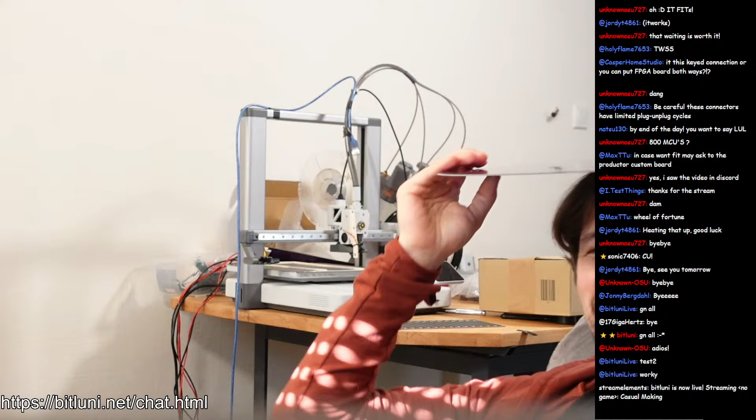So we have this board. I can do a Colombian head, I can make a Colombian head. I just need something on top here, a 50 centimeter Mexican sombrero.

And what we can do, oh yeah, so this was one of the boards that we received yesterday. Then we have, you can still see we have sunshine here.

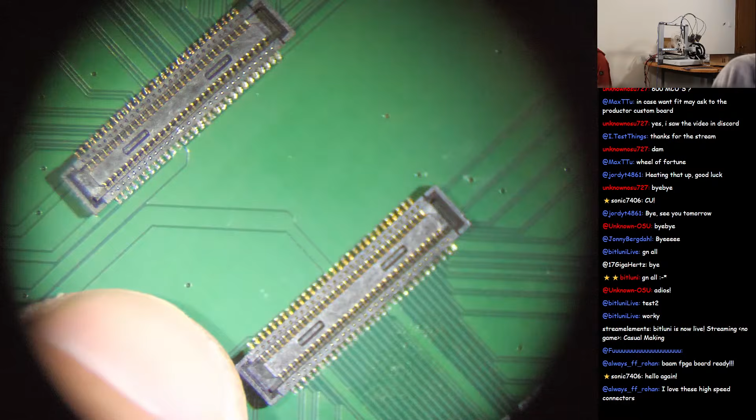I'm wondering, there must be some sort of compliance in this connector, because you can never pull it perfectly to 0.1 millimeter.

Millimeters, because the footprint, I think I will make the pads even shorter, because if we look closer, oh, enhance.

Wait, oh, I can't enhance because I put the microscope quite high yesterday. Okay, let me enhance even more. Here.

Can't enhance even more. I think pin pitch is 0.4, 0.5 millimeters here. Yeah.

The reflection is confusing because it looks like it's not really well sorted, but it is. Yeah, no, that's all right.

Yeah, it could be shorter by, I don't know, even half a millimeter, so it would align itself better. This way we have too much space for adjustments. Yeah.

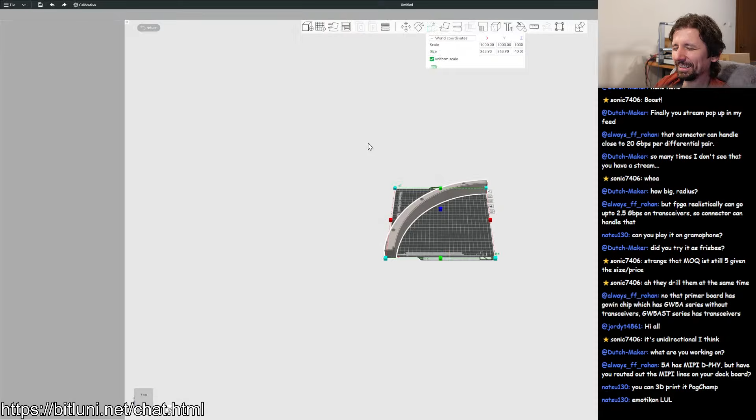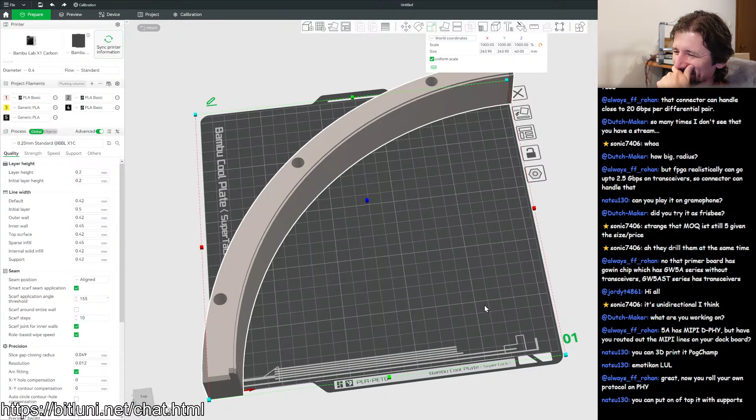Error. Yeah, no. I can rotate it, and no. I think I need to cut it in thirds or whatever. But cutting it in thirds, no, in 6 parts is gross. Okay, 6 is not a bad number. It's not a prime.

Dang, all right, so let's take... how do I cut it so I can still get it bigger? Okay, first of all, I need to keep the faces as they are right now, so I guess I will cut it in pieces like this here. So it's not quarters, it's, yeah, in 6 pieces. Alright, this will be interesting.

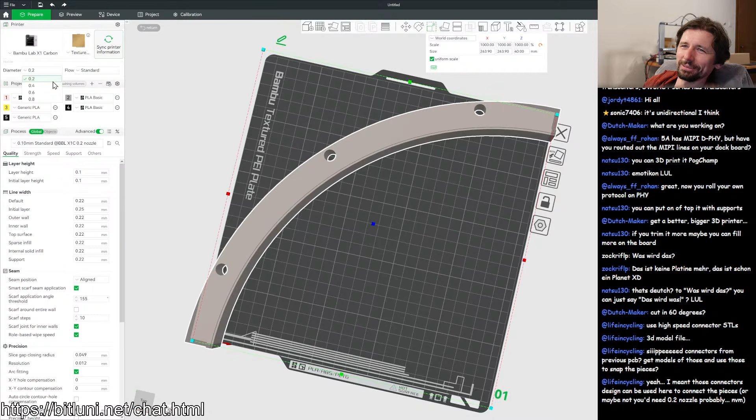Alright, so this part should be a little bit smaller, but now we need to adjust the groove. So how do I do the groove? I think I will do the groove a different way. We can do the groove, let me create a cylinder maybe. Nah. Yes.

Create cylinder. Yeah, or this is not okay. Vertices 128. Depth is, I would say, what kind of depth do we need? Like 4 millimeters, that's 0.4 since this is in centimeters. Everything. Location, okay, 0, 0, 0.

Radius will be... where are we? 25, a little bit more. 26. No, 25. Okay, that's the 20. That's a little bit much. 25 point, since it's 4 millimeters.

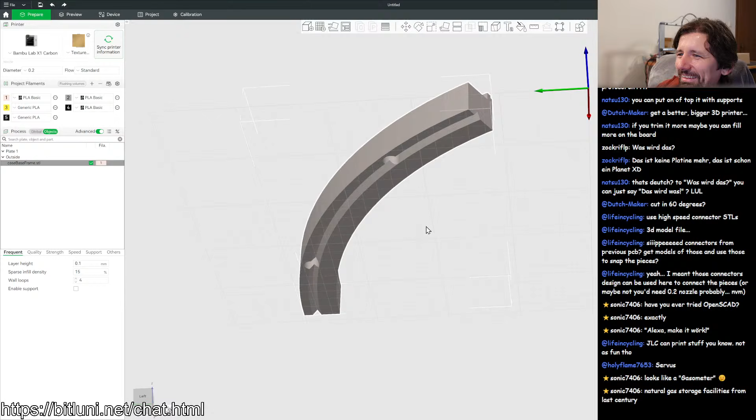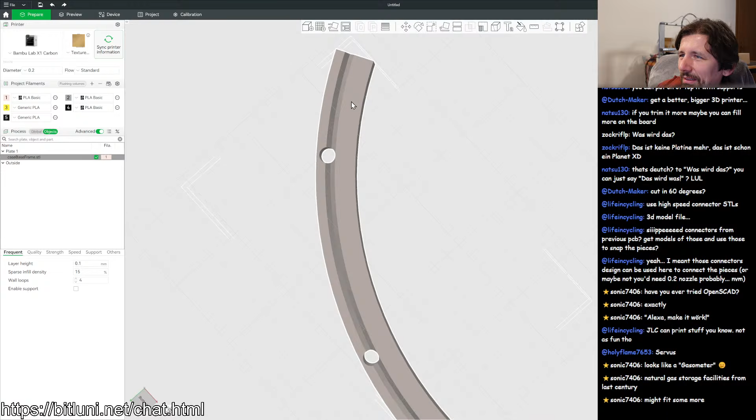This is 1/6 of the thing. Look at that. Oh wow. Weird. Maybe there would be like, if we have, yeah, if we had something to align it, but well, we can't get everything made perfect here.

We can even print 2 at once if we would like to. So how does that? That's the textured PEI plate. How long does that print?

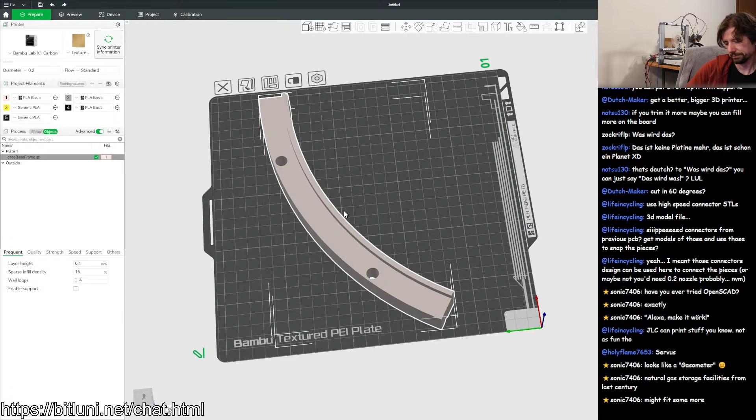I think I have, let me check what, 0.2 millimeter is really slow. But I think I have, oh I can't see. I might have 0.2 millimeters in there, if I didn't change it again. Okay, standard, flow, PLA, basic. Yeah, I think I have.

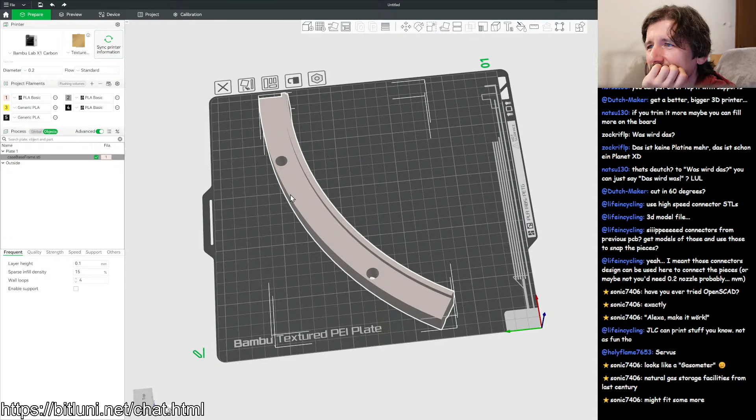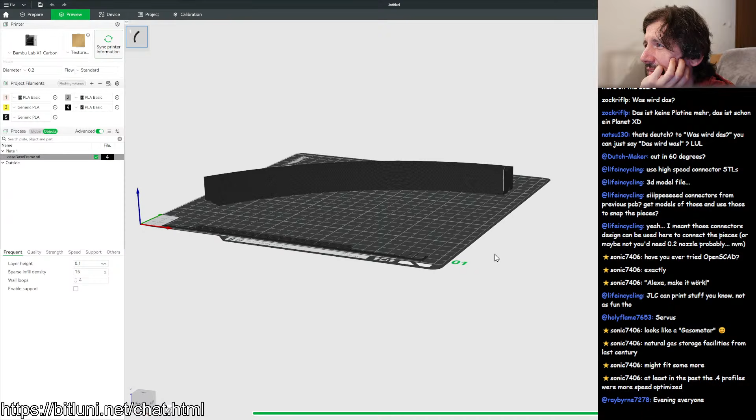We can try printing in black here. So let's. Oh yeah. Hey Ray, let's test how that does. Alright, that takes 6 hours.

Okay, let me change my profile. This is not good, it's way too slow. I need to print so many of those, it wouldn't be finished this week. Okay, what about 0.8 millimeters? Yeah, 1 hour, that sounds great.

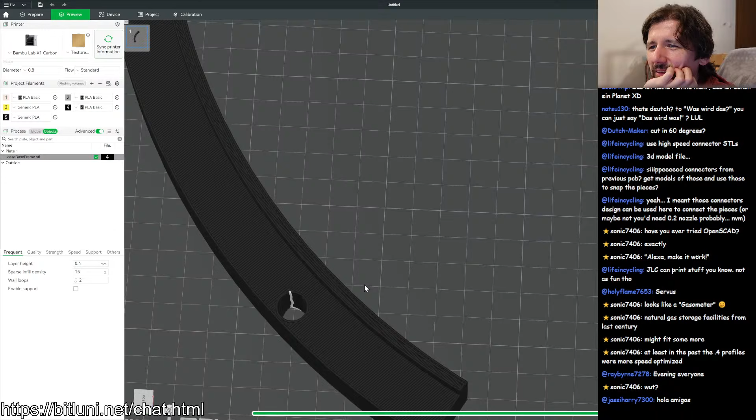But the 0.2 millimeter nozzle is currently mounted on. Yeah, we can change the nozzle and do that. That looks like, I guess that will work. Hey, jassiharry. Oh, we need 6 of those, not only 4.

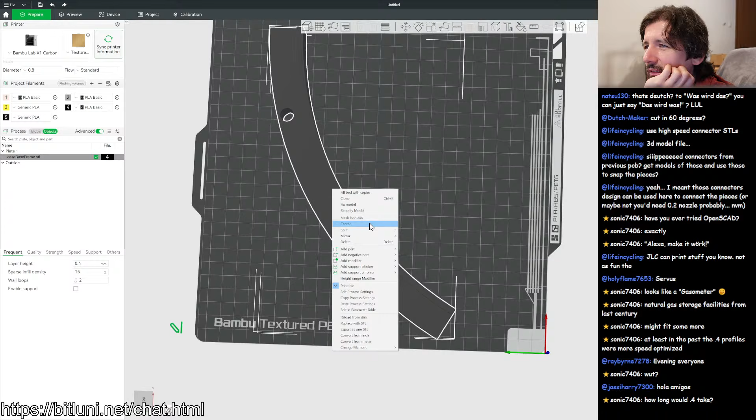We can try prepare, a lot of this is preparation. So copy, where is it? Mirror, no, centers, fix, clone, and clone 5 times. I think we can print 3 at once.

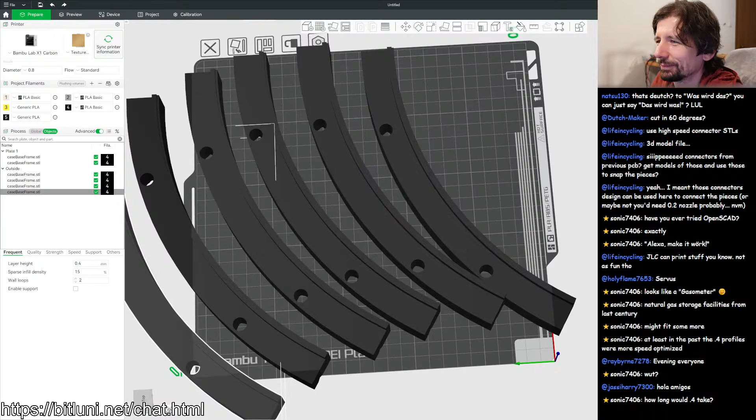Ah! What would happen if we print 3 at once? It's so weird, it looks like it's off. I guess we would need to optimize the placement.

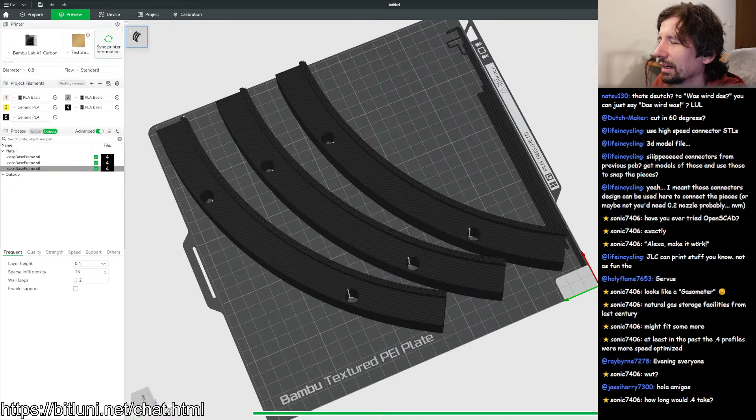Let's just see how that slices. Is it? Yeah, we only save like 15 minutes. But we don't save anything because if one detaches, all the prints are broken. So I don't take the risk unless I'm going to bed and leave it printing overnight. So I will just print 1 now, and let's switch the nozzle then. Oh yeah, that will be interesting.

Do we have a nozzle here? Oh, yeah, let's take a look. What kind of nozzles do we have? We have... Oh, I don't know if we have 0.8 here. Yes, we have 0.8 nozzle here. But it's like a partial... It's only the nozzle. No, it's nozzle with fan and everything. I hope this is the right one for... Yeah, that is the nozzle for this printer. Hey, the Sheepu!

The Sheepu, real talk about Open Hardware Summit. I'm still not sure if I can go. Yesterday I had a mega rant about the public transport, which they want like 200 euros from me to go back and forth, it's like twice as expensive as going alone by car. So I will see how my project proceeds, and if I have it ready, so we can code the ultra cluster at the weekend, then I will put it in my...

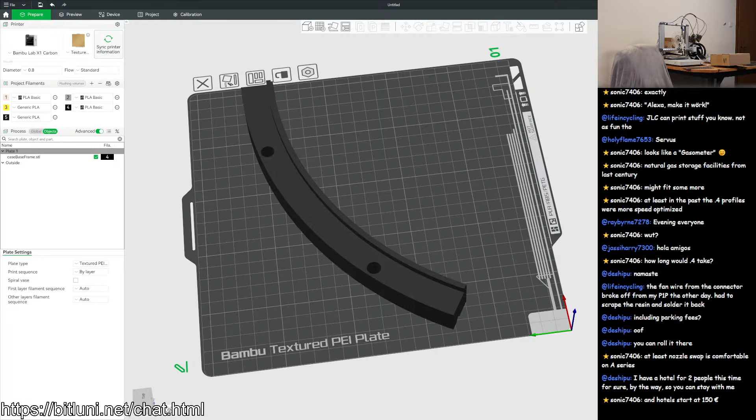Okay, I will clean that thing. Oh wait, you're not seeing anything. Camera.

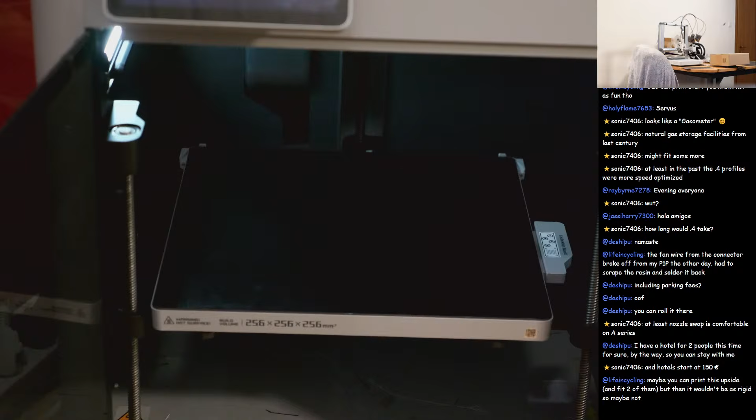Yeah, I can fit 3 or 4 on the plate. No worries about that, I just don't want right now. I don't want to risk, if one fails or something, to risk like 4 hours of print.

Okay, new firmware. Yeah, okay, you can load new firmware. I don't want to remove the AMS.

I can print so, oh yeah, okay, we can print 2, but you want a quick stream, so we will see only. Okay, yeah, let's remove that.

Can you even see anything? No, you can't. This tripod is not what we need here.

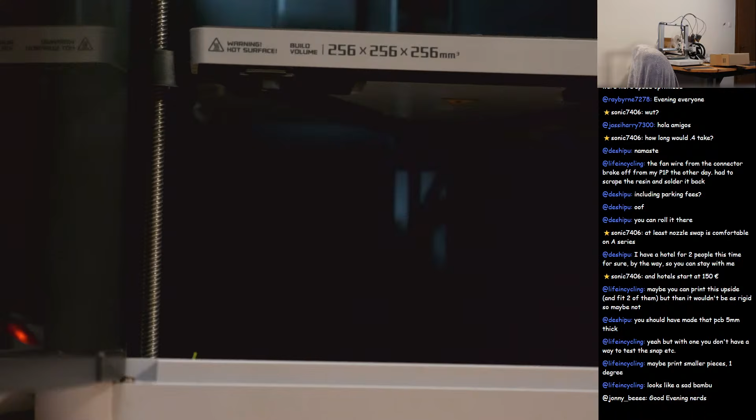How do I... Yeah, I will take the camera off the tripod, sorry, and put it on something. Yeah, just put it. I put it on a PCB, a stack of PCBs. So this is my new tripod here. Nope, not good enough.

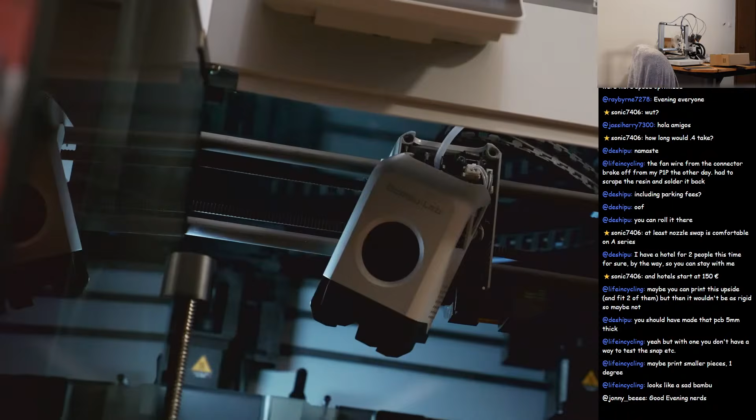I need more PCBs or connectors to stack. I need some parts here. This is now a good view. All right.

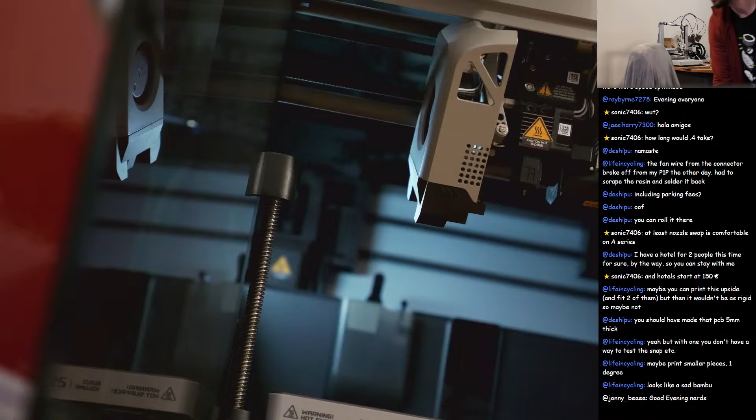This is the wrong tool, give me the right tool here. Oh no, is it even here? The printer, we are breaking the printer today. Switching the nozzle to 0.8. I might need to, I don't know if, do we need to heat it up? No, I hope not.

Oh wait, I had tools here, let me take this one. Start a fire, okay. That's 2. Yeah, I switched, I think this is 0.2 right now, so I have switched it before. Just need to get the right size tool size here. Huh?

The light is so dim. Weird. I don't have the right size tool here. Okay, I'll be back in a second, let me grab my tools.

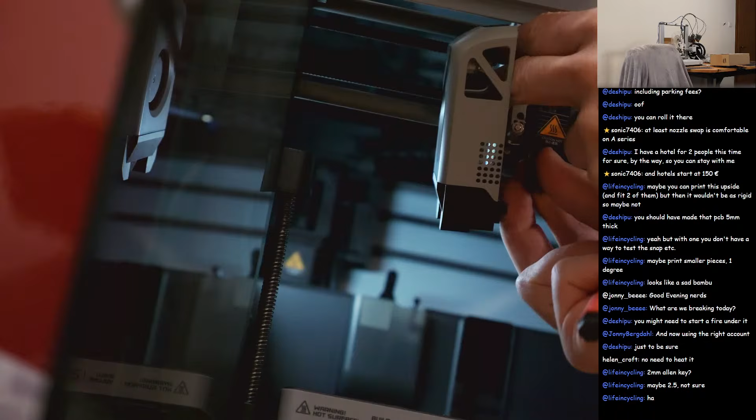Am I missing something? Here we go, nice. And we need to disconnect these things here. We don't want to rip off the connector. Here we go, so that was a nozzle of 0.2.

Yeah, now we're having 0.8 for a change.

How does it, where those cables are? What was the cable management here? If I press it in like that, it doesn't fit. Okay, huh?

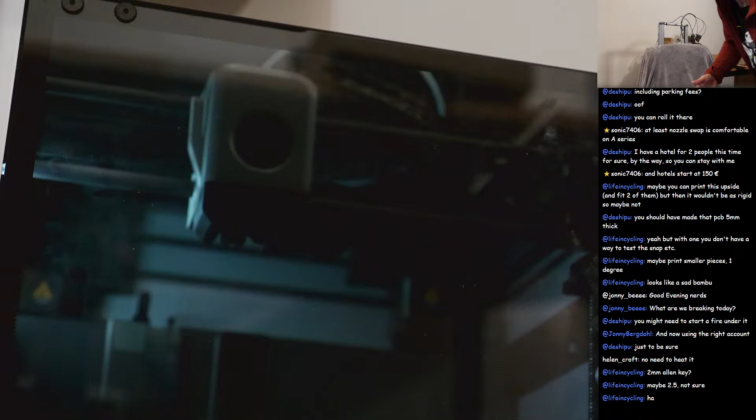The camera was totally off. Okay, I will clean the bed while it's updating. It runs a software update, and then we can start printing it.

Americans would call it Windex, just a window cleaner, or glass cleaner, Glasreiniger. Needs to be free from fat, any grease needs to be gone, so everything sticks nicely.

All right, oh no, why is the update so slow? Still downloading? Oh no, I shouldn't have started it. What is it downloading? It hangs at 1%, does it even have a connection?

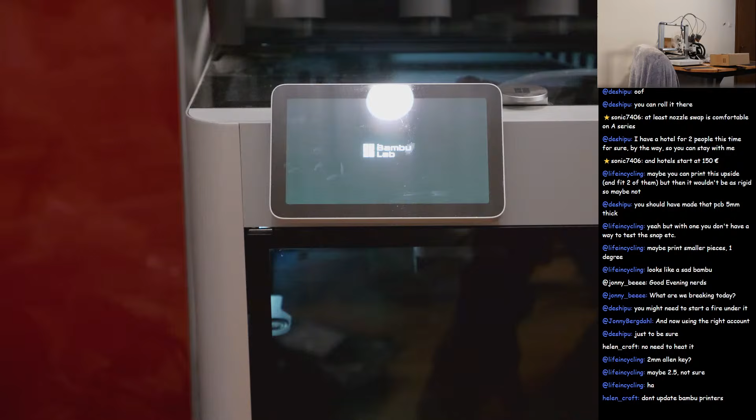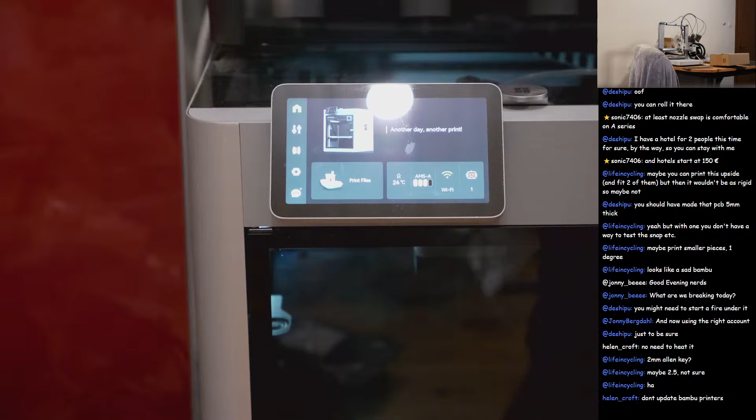Nope, let's not update right now. Alright, let's try to print it with the new nozzle. Standard flow.

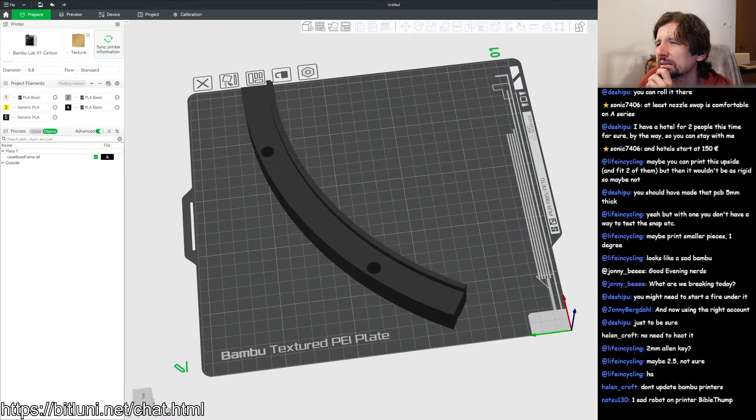Yeah, let's just slice the plate and print plate.

I hope it's still connected to the WebUI. External? No. Time synchronization timeout? What? What's going on? Wi-Fi?

Who's there? Hey Alex! Are you in Berlin already? You also going to Open Hardware Summit?

Okay, let's try other Wi-Fi.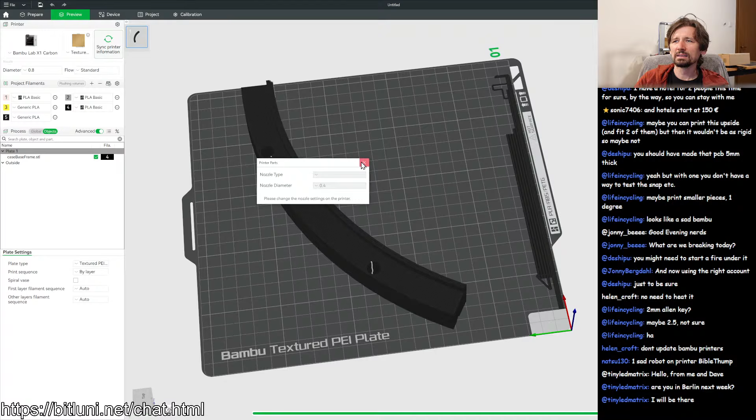Yeah, from Friday. I'm not sure yet. I would need to go by car because Deutsche Bahn is trying to rip me off. Even the Bahn card doesn't make it cheap. So, and I have a big...

Let me print calibration settings. I have a big device, hopefully to bring and show.

Oh, you're in Munich. What did you do in Munich? Just visiting Alex, or any occasion, a special occasion? Did I miss like Electronica or something? No, Electronica should be later this year. Should it? I don't know.

No. Where's the settings for the print options? I think the nozzle.

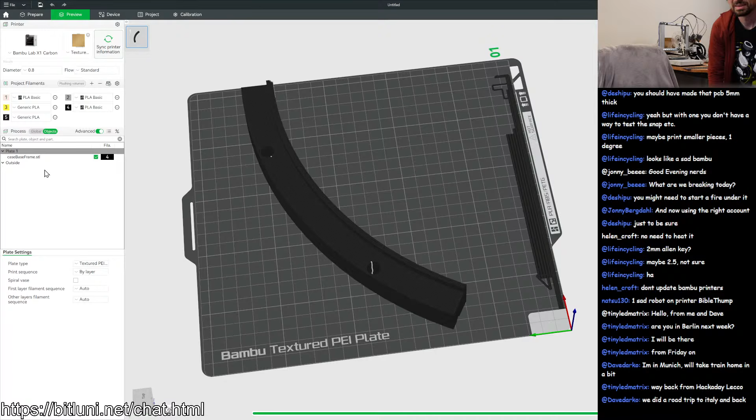Why is it so hard to print anything nowadays? Okay, status X1 carbon. Connecting. It's not connecting anymore. Okay, I probably need to reconnect it because it says my login information expired.

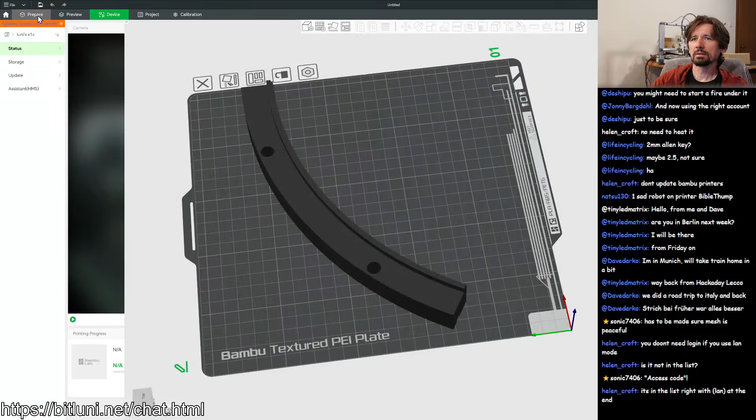Storage needs to be inserted before printing via LAN. I don't have an SD card in there. Okay.

Now it's probably also picky about the SD card. Where are my SD cards? In this chaos here. Okay, let's see. What do we have? Some. That's 32 gigs. 8 gigs.

Now it probably complains about the format. Format required. Okay, let's format the storage. Might be a broken card though, I have no clue what's on there. I don't care, I just delete everything now.

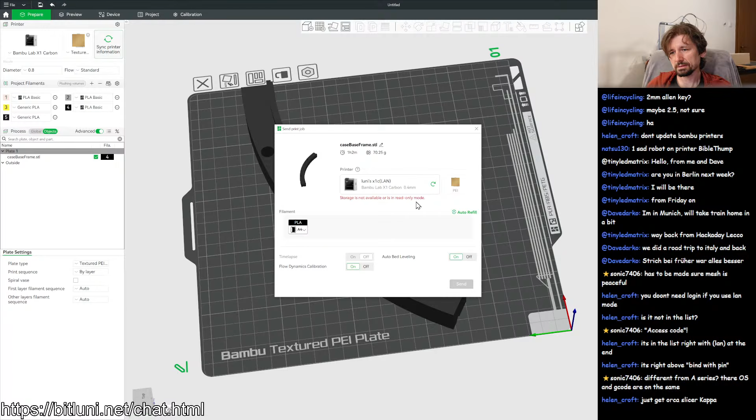What else do we have? We have here another Transcend and oh, this one! Lexar. I think this one was shipped with a 3D printer. Yeah, it's not formatting. All the formatting takes too long.

Orca slicer. Is this good with Bambu Lab printers? Okay, yeah, that's not formatting. It died. It hangs. I think this SD card was faulty.

Oh, that's cool. Didn't know that. Oh yeah, I think I saw that the Bambu Lab Studio is open source. That makes sense.

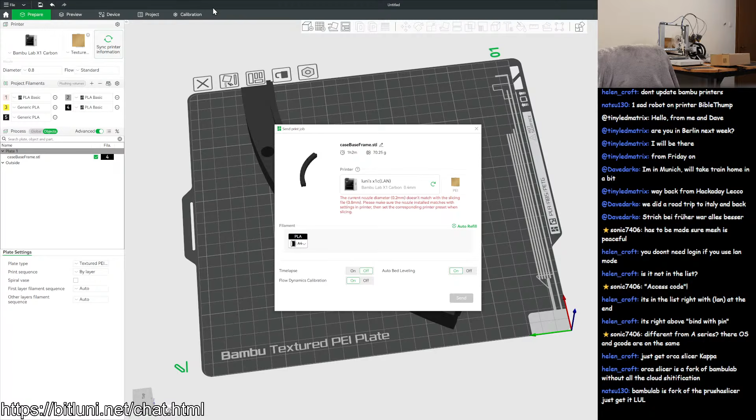Alright. Storage. Okay, yeah, storage is working. I don't need to check if this card is really faulty, so I will just throw it away. There's no time.

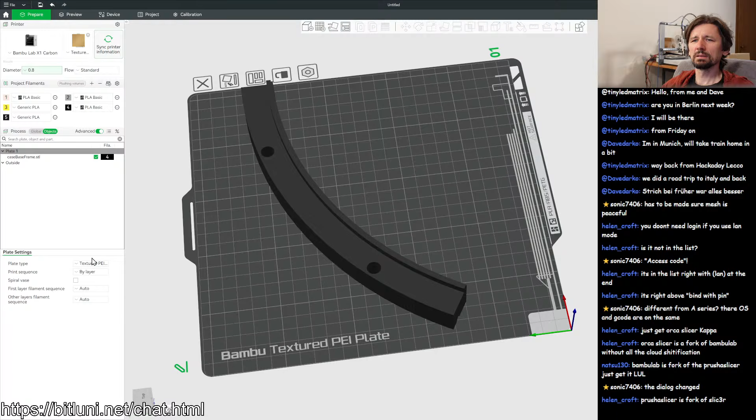That's wrong. Diameter. Do I need to set the nozzle size in? Okay, I think I need to change the nozzle size in the settings, but I didn't find it yet. Chamber motion.

Settings. Yeah, but where's the setting in the... I can't find it. I can't find the setting on the printer. Nozzle extruder. Oh yeah, here it is. Okay, found it.

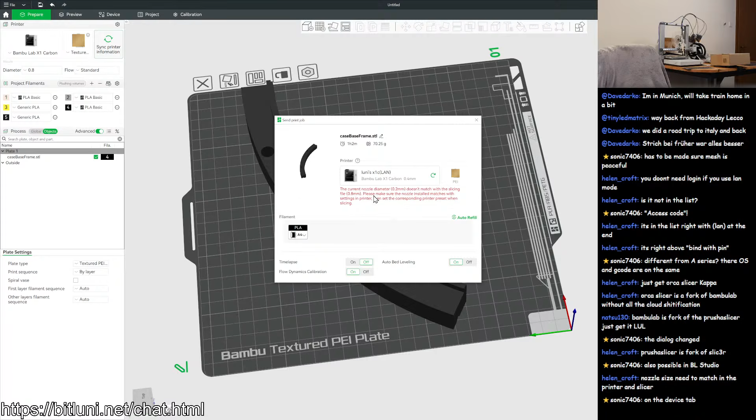Ah, here we go. All right. Refresh. That's wrong, my friends. That's wrong.

Doesn't show. Here we go. Send. That took me half an hour.

It's still not printing. Let's wait and see what happens. I might also need more filament. Not sure if that kilogram that I have there is enough.

Time-lapse BibleThump. Yeah, alright. No updates then.

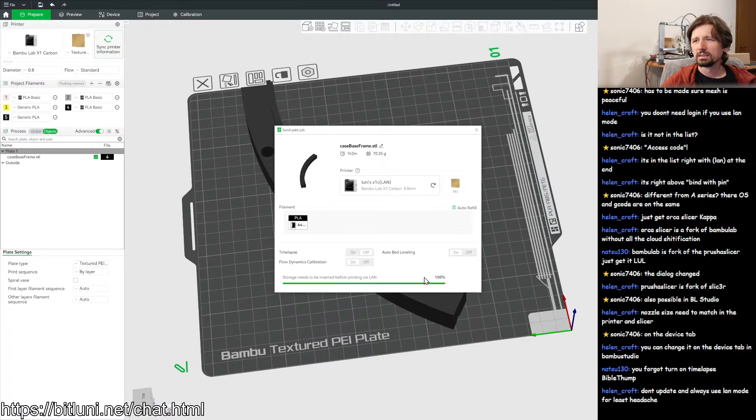Okay, it says storage needs to be inserted, 100%. Is it doing anything? What is it doing now?

It doesn't look like it. Yeah, it shows 18.9 gigs of 29.5.

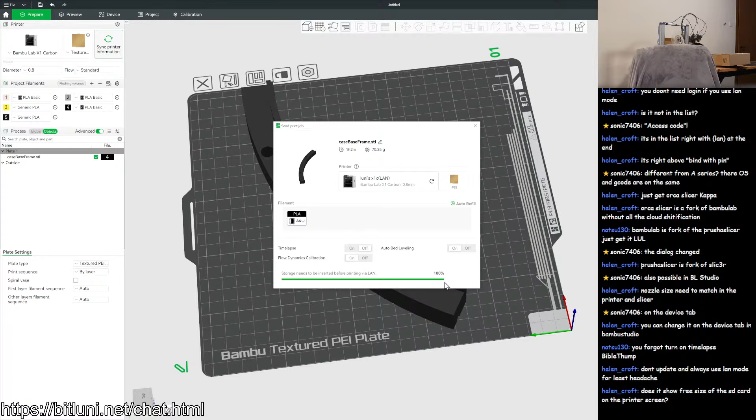Alright, print files. There are even files on that card. No, internal SD card. Yeah, there is stuff on the SD card. Oh, this is so weird.

Or let me try again. Oh no. Yeah, okay.

I will also restart the printer. The timing, nice.

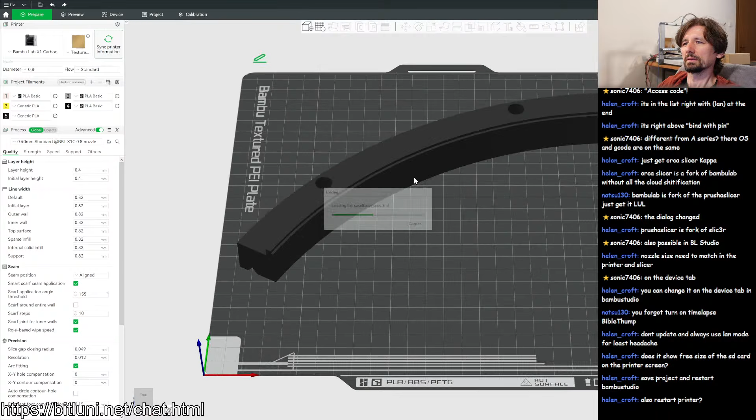Yeah, hotfix, blah blah blah. Blah blah blah, Mr. Freeman. Carbon, textured PEI, blah.

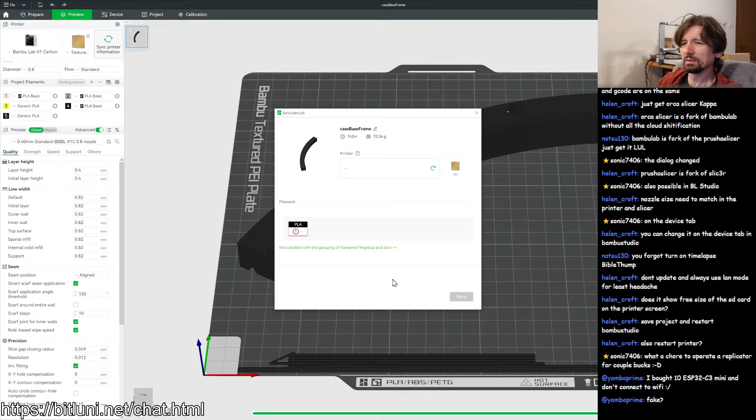C3, don't connect to Wi-Fi. Yombo, I have no clue. What's going on there?

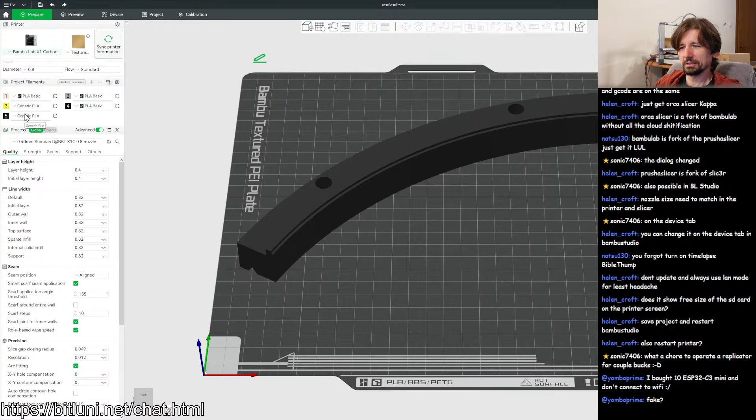Did you try any firmware where you discover networks or whatever? I know, some sort of Wi-Fi issue. No printer.

Okay, we are connected. Yeah, I would try to see if it even lists open network, or just lists the network at all, so you know Wi-Fi is working. And you have maybe, I don't know, that there is.

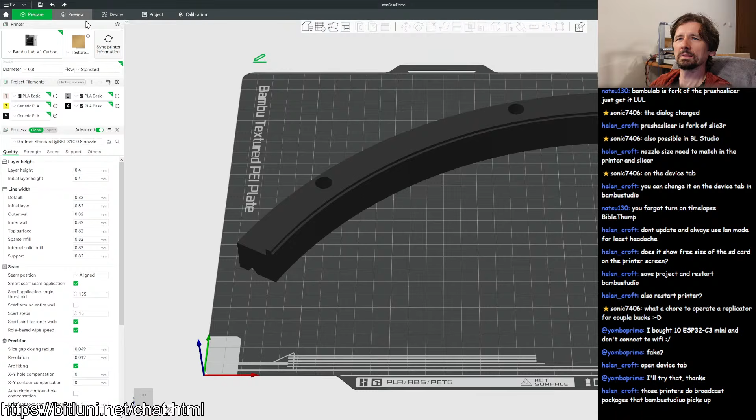Okay, let's try again. Now it shows everything on send. Ah, here we go. Ah, some global variables or stored state or something. Ain't nobody got time for that.

C3, is it like 5G or 2.4? Okay, it wouldn't recognize the Wi-Fi. I don't think C3 even supports 5G network. It's weird. 2.4, okay, that should be supported by any router.

Let's turn on the camera, can we? Play. Let's see if it does anything. It moves, yeah.

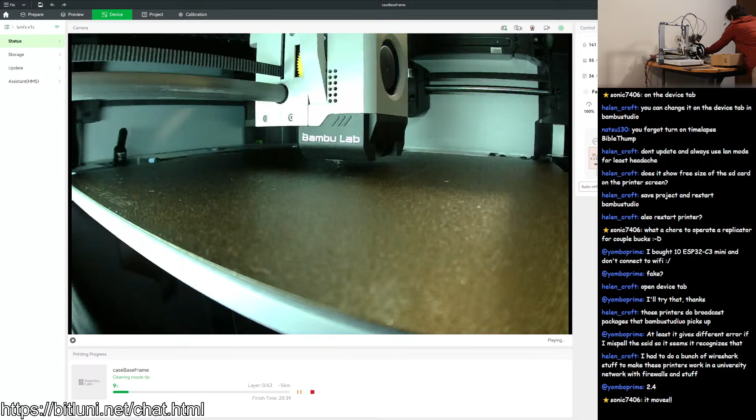Okay, I have some connectors here, that's some parts. Okay, these are 22 microfarad capacitors, 25 volts, so they're the input side caps.

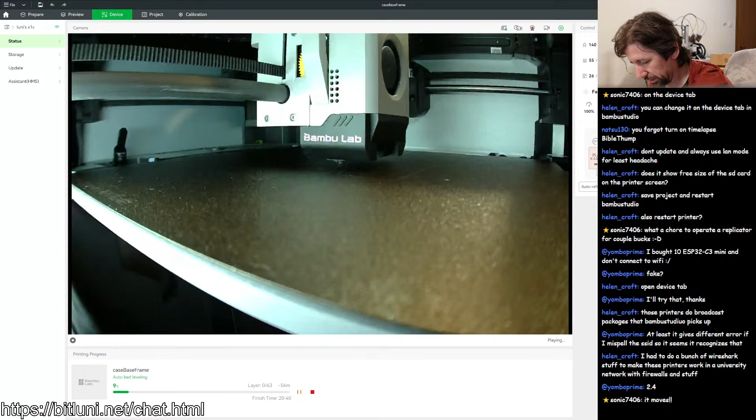Not sure how many I planned to use there. Then we have some of the JST connectors. JST.

We need a trimmer. A series. Really? Oh.

Oh, presence sensors. That's what I was thinking today about, like if I want to place some control, presence sensor control for lights in my home, but not connected over Wi-Fi, just standalone.

Okay, I think, yeah, these are the output caps. Terahertz radiation, that would be interesting. 6.3, okay, yeah, that's the output caps, I believe.

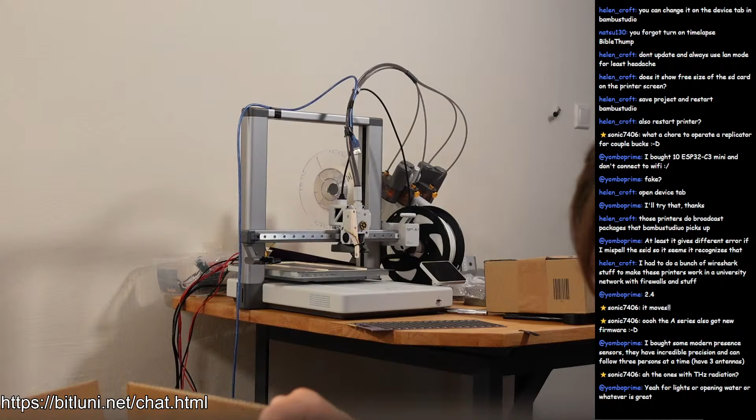What's one thing that I'm like, in my living room, there is a window just behind the sofa. Okay, now it's doing the vibration test. Behind the sofa, and whenever it's afternoon, the sun is shining and we have glare on the TV.

And I want the... oh wait a second, look at that, the pink connectors. Sweet.

That's the pink SATA connectors, and we don't have a use for the SATA yet. I bought so many SATA cables. And these are the other SATA connectors. Okay, so we found that.

We need to open the Reichelt box, with, I think, the trimmers inside, if I didn't buy them. Where were the trimmers? Because if you don't have trimmers, I don't need to do anything.

Need more packaging material. More. Oh no, these are the... okay, these are the 2mm headers. I bought some from Reichelt because they shipped quicker.

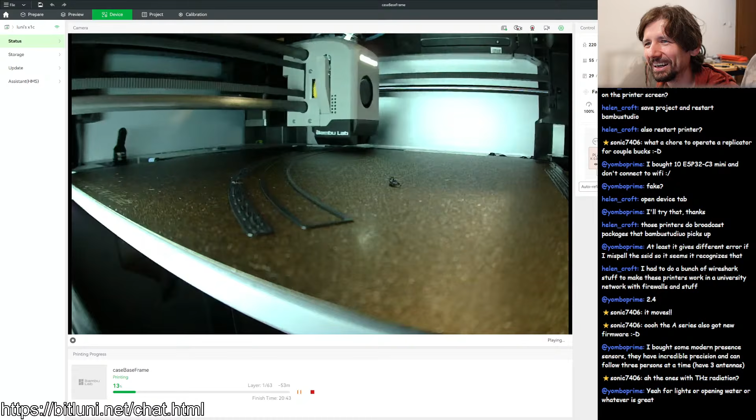And not wasting any time here. How much infill does it have? I didn't even check. Not that it's like solid.

Infill. Oh, sparse. Yeah, but this wall strength should be plenty of strength here.

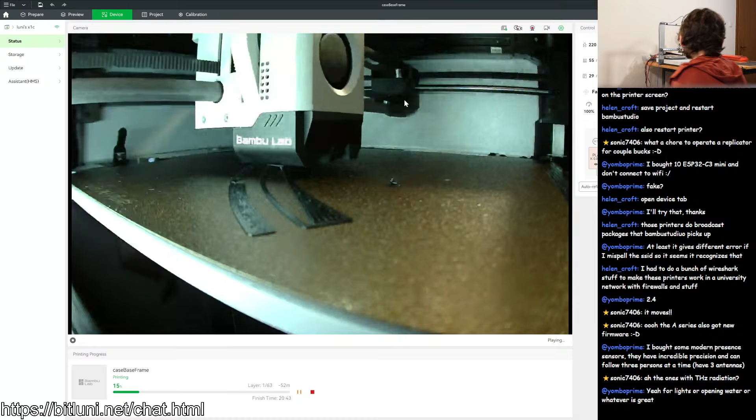Okay, let's make the jig then. I will use the bigger camera again to share every step of that with you.

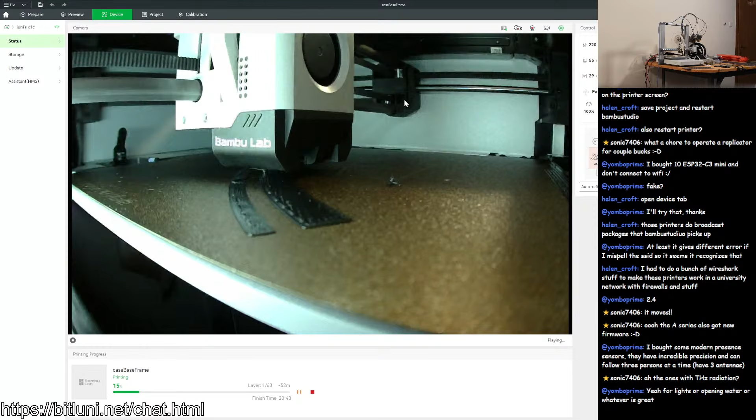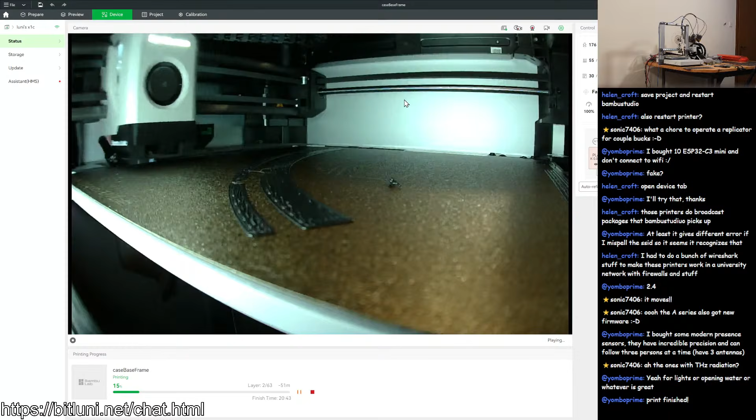Oh no, I pulled off the cable. Okay. There we go. You're joking. What did it do? Why did it have like a pause there?

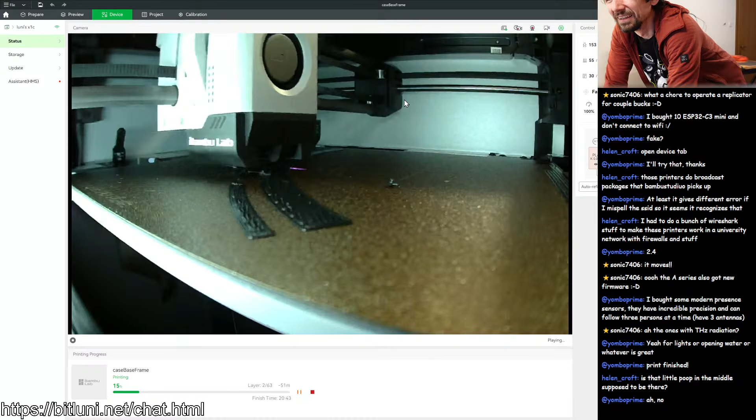Weird. No, there's like debris. You mean this here? All right, pause and clean. Probably because the first layer always has a little bit of variation in height, and after that it's better. I have no clue, might be.

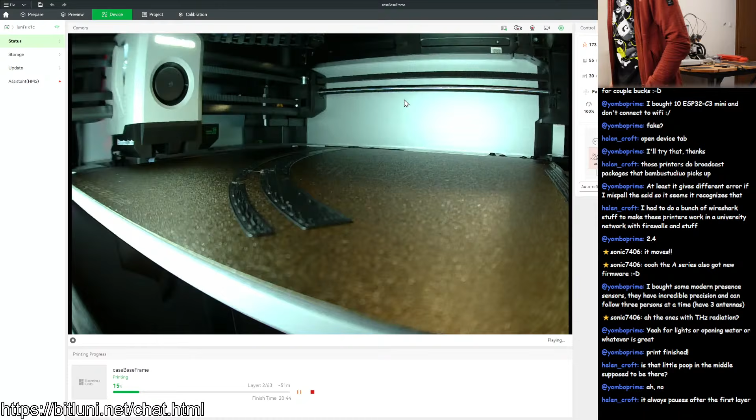Okay, Kapton tape. We used it yesterday. There it is.

This is our jig. Oh, I'm not sharing.

Ah, okay. Need to get this aligned properly, like right angle. Now this.

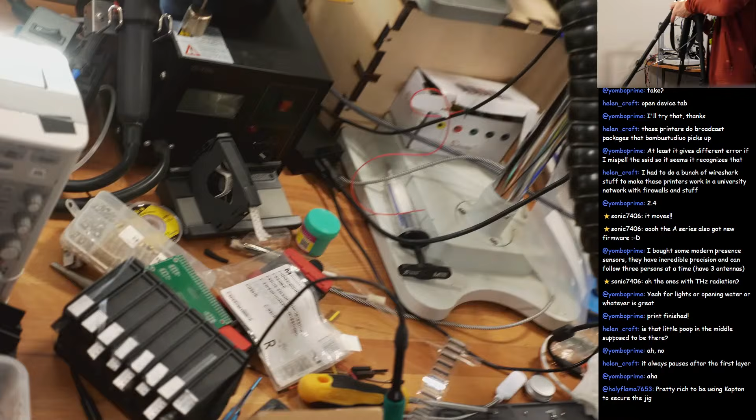Barf cam activated. Ah! The chaos here. The chaos is real.

Okay, yesterday I used a little bit of stencil as the spatula. There is still some paste from yesterday, and I think this is still good. No, it's not. Okay, let's get new paste then. But actually, it's not bad. It's not water based, so let's try to.

Is the reflection bad? Let's try to paste that. Yeah, it's a little bit, it feels too thick, especially on the big pads.

Ta-da! Nope. Here it is, these pads have not enough paste. Here, now it's good. Alright, that's that.

Hocus focus. Hocus focus! Damn it. Here we go. Yeah, good enough.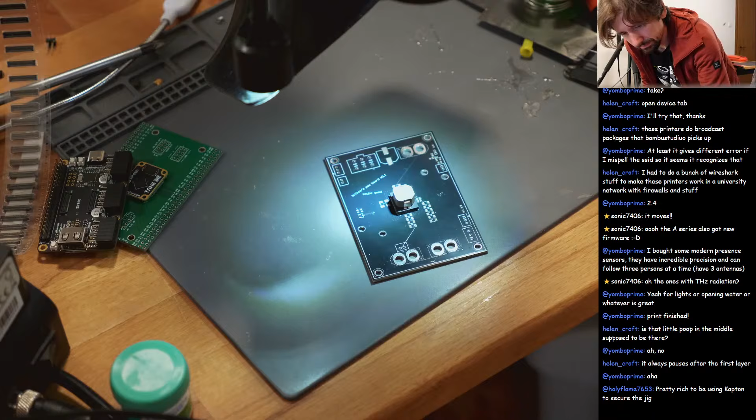Have all the stuff here. Did I mark it even? Let me check if I. Oh, let's see.

Because I might need like different caps for input output. I have no markings about what type we need there. These here, and these here.

Hey cosine, you're a little bit late. I'm just about like to reflow that one and be good.

We are trying to assemble the ultra cluster.

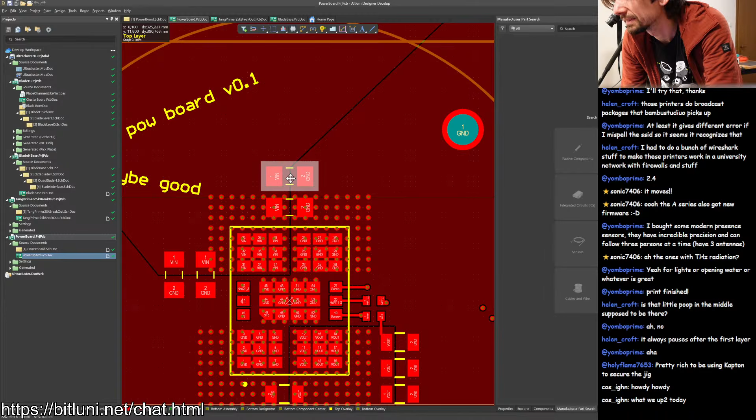22, 22, 22, 22, and these are all 100, yeah. 100, 100, 100, 100, 100, 100, 100. All right, so there is no surprises there.

We will just place the caps and be good for today, huh? Oops.

All right, need to be sure that I place the right ones here. The 25 volts needs to go here. Any other small things? Oh no, I need to place the other components as well. There are some.

For I think 0 ohms there as well, but I should have them here. So let's do the biggies first.

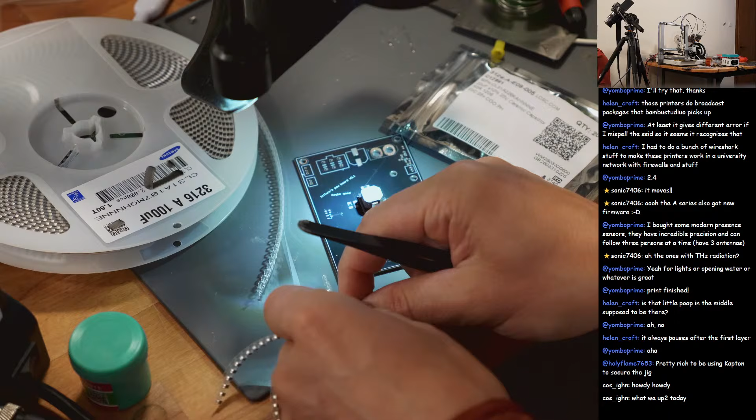Need 4 of those. Right. Ah! Come on. This is sticky. Like that.

Alright, now this was that one. Let's do the 100 microfarads. I'll use a full reel of that. Oh, there's a stray one. Interesting.

A pick and place machine now. This is a power regulator. It converts 12 volts to 3.3 volts, or any other voltage, because we will use a trimmer for that.

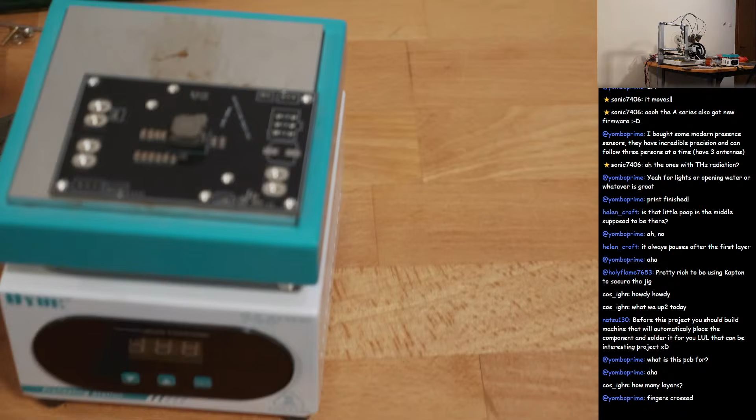I want to see it too. Okay, bath cam mode activated. Oh, yeah, fingers crossed, it will be weird because this is quite heavy on copper. That's why I'm using the bigger, slightly bigger thing here. But it's a low temp paste, so I'm not really worried.

Give it to me, baby. Alright.

Very condensed stream today, except for the struggle setting up the printer. Alright, it's 31. Okay, let's wait a little bit before I record actually.

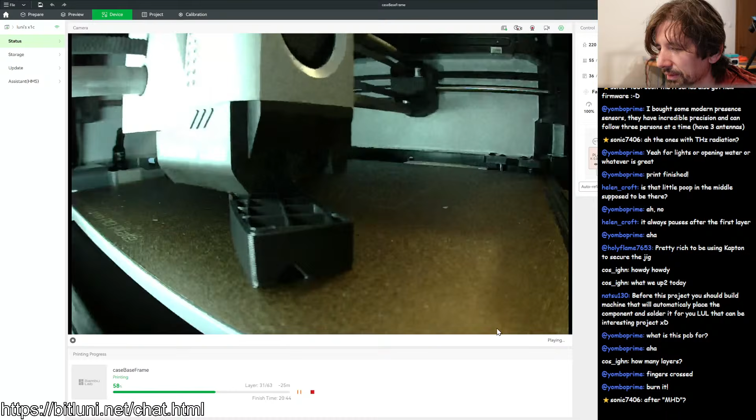And maybe we have even ready, looks like, oh what, 25 more minutes? Yeah, we won't see that being finished. I thought it is only like 1 hour print. Didn't we start like already 50 minutes ago?

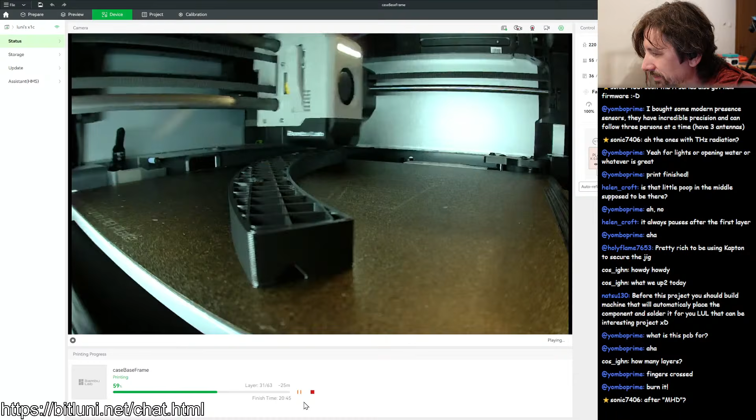Let me check if the board is done. We won't be waiting for the print to be finished.

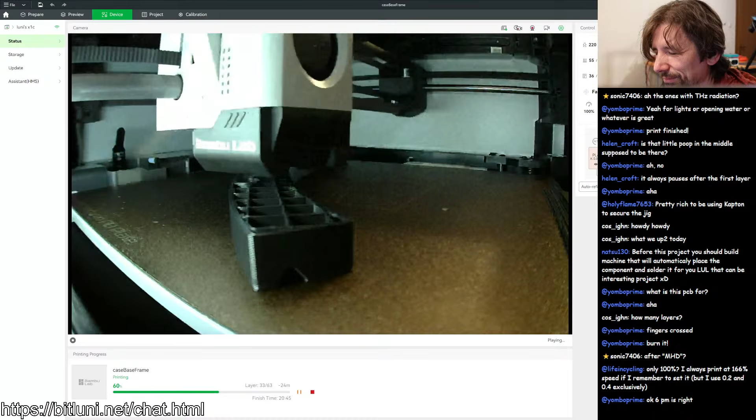Oh wait, let's see for that. We can, is it still hot? Oh, it's still hot. Yeah, it's still hot. Yeah, but I will take it off and let's see.

Before I say goodbye. Yeah, it is solidified already. Yeah, not touching that. Yeah. Solidified already, but it's still hot.

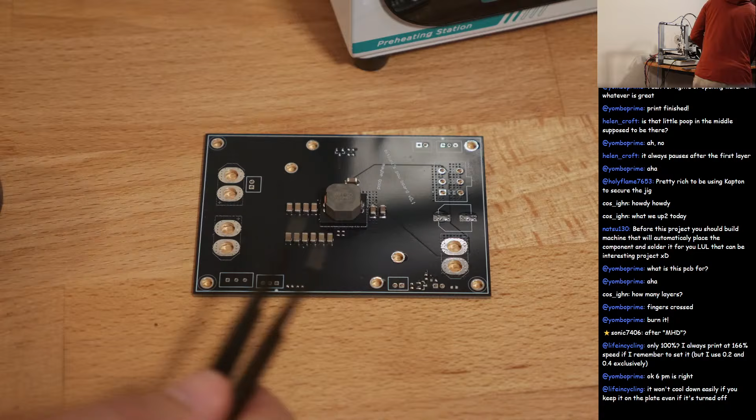And this is, yeah, I know. Here we go, that's that. See you tomorrow, I will see if I can either finish that.

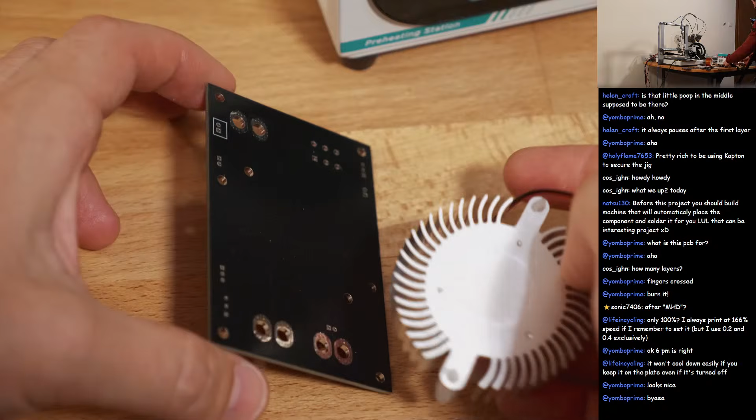Interesting part, on the back side, with some thermal pad, we can cool it down then here. This is extra for that, and we have plenty of vias. Look at that, I didn't plug the vias to have that filled with copper, but I think it is still this sort of, it's so hot.

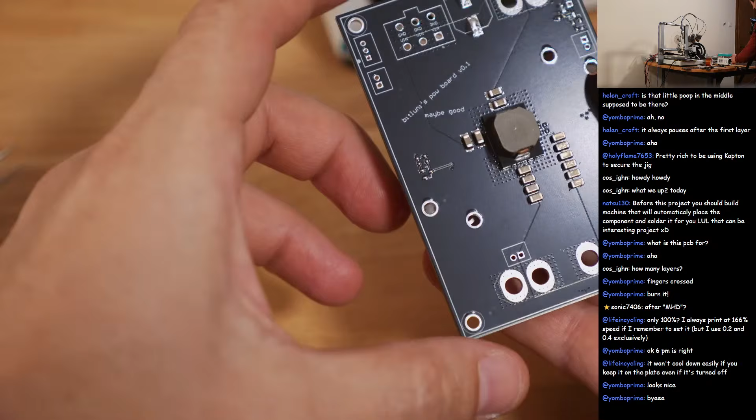Like that, hope it fits in the end. It's weird. Is it that? Yeah, cool, huh? Alright.